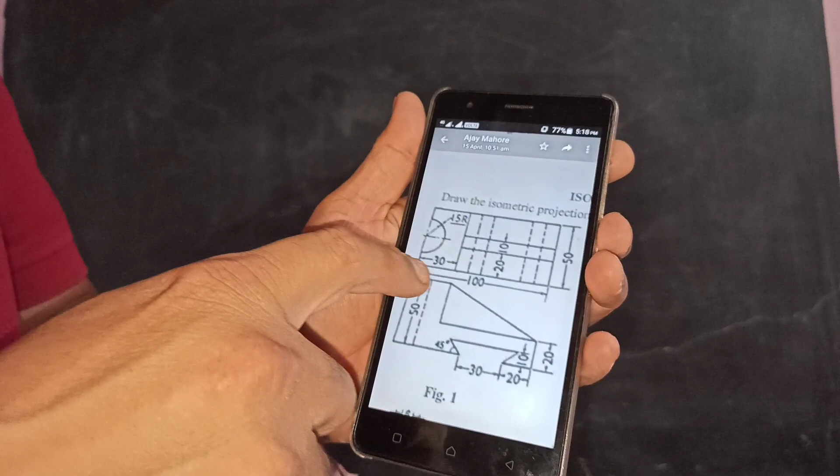We will see this problem on isometric. This is third angle projection, and this is top view, this is front view. So in front view we get the height and the length, in top view we get the length and the width. So the length is 100, the height is 50, and the width is also 50.

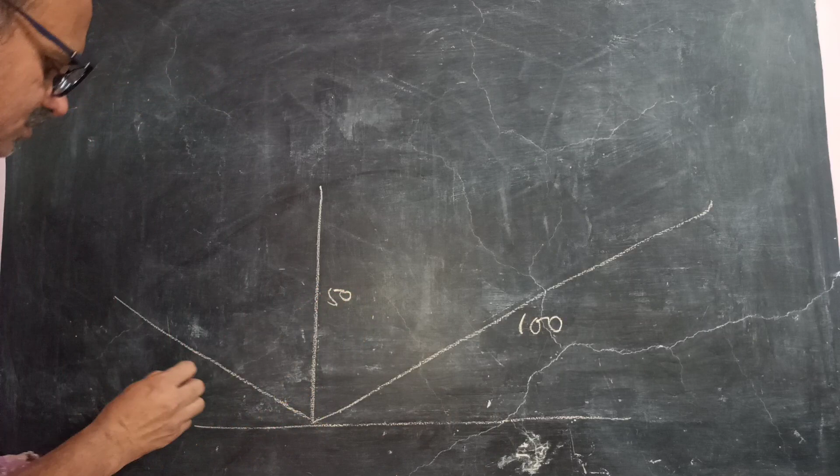Let us start. Draw a horizontal line. So this is 100 at 30 degrees, this is 50, and this is also 50. This is 100, this is 50, and this is also 50. This is 30 degrees as usual, this is also 30 degrees. So complete this box.

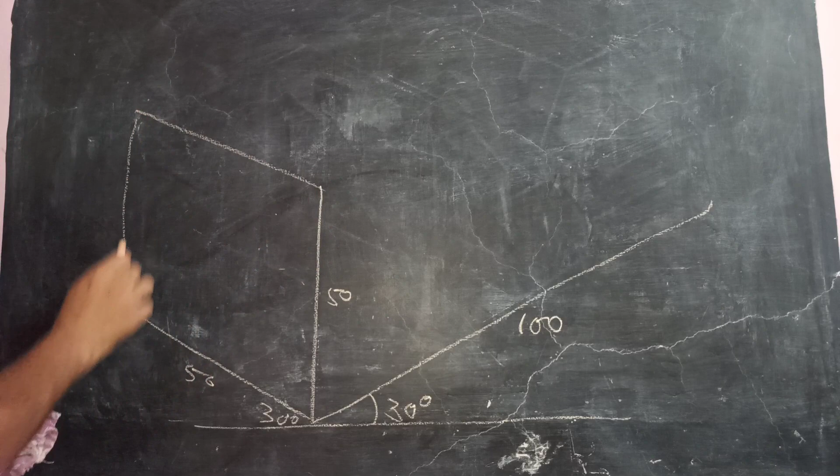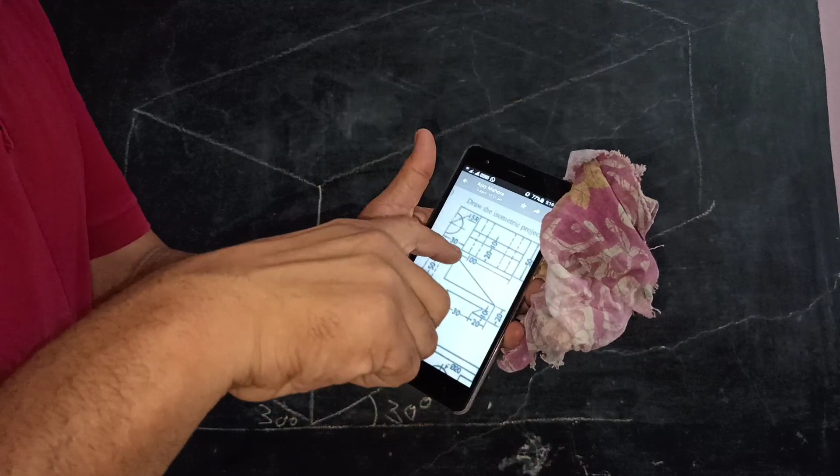Like this. So it is 50 by 50 by 100. Let us start from the base. So this is 30, so this is 30, which is straight.

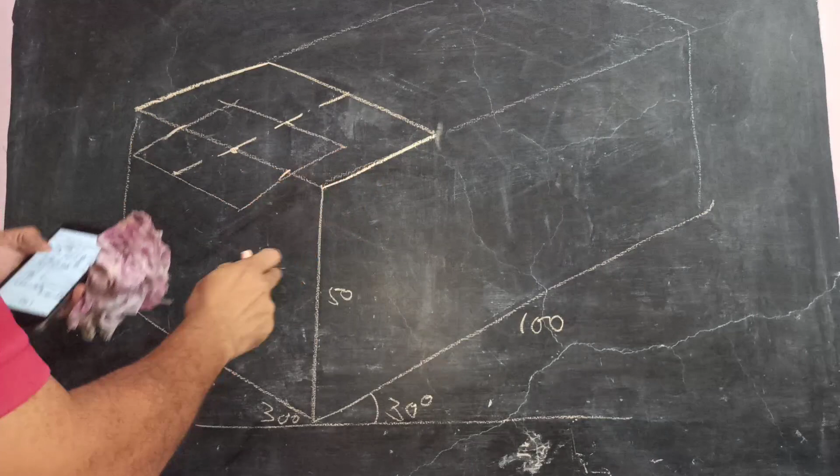So on all the sides 15, then 15, 15, and 15, all the four sides. Draw this rhombus parallel to this, parallel to this, parallel to this, and parallel. So these two lines must be parallel to this. These two lines must be parallel to this. So this is the rhombus. Here we got these two angles as 120 degrees. So you can join the midpoint of opposite lines from this.

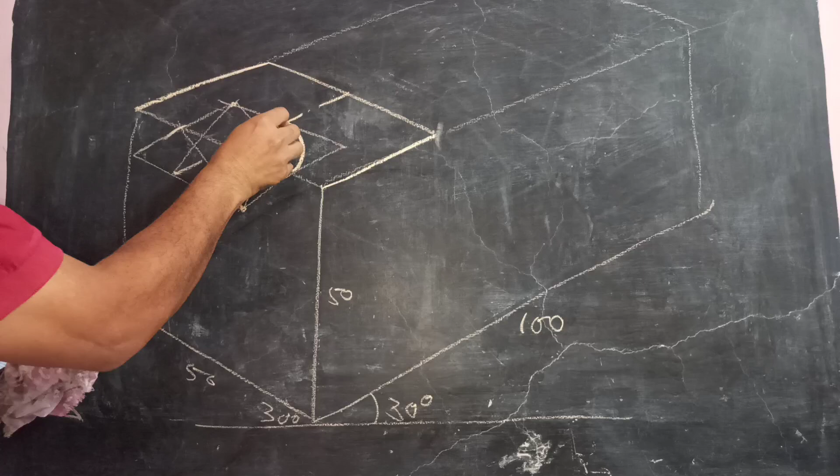And now it is a semicircle. So the two centers are of only use, this one and this one. So take this center, this much as radius, draw this. Take this as center, this much as radius, you can complete this. So this is what is the semicircle.

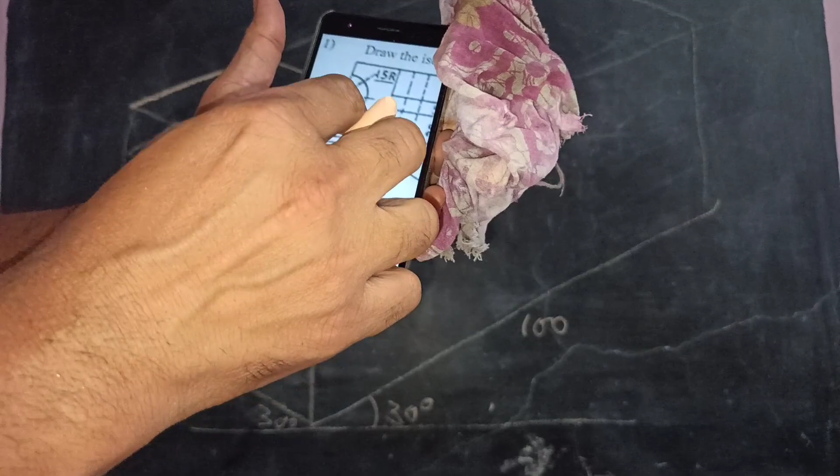Now it is throughout its height. You can see this hidden line. So it is throughout its height. So you can bring this downward parallel to this.

Now this semicircular slot, it must be here also. We have used these two centers. This won't be visible because it will hide behind this. You can bring this center by 50. This height should be equal to 50. Then take the same as center and you can mark this.

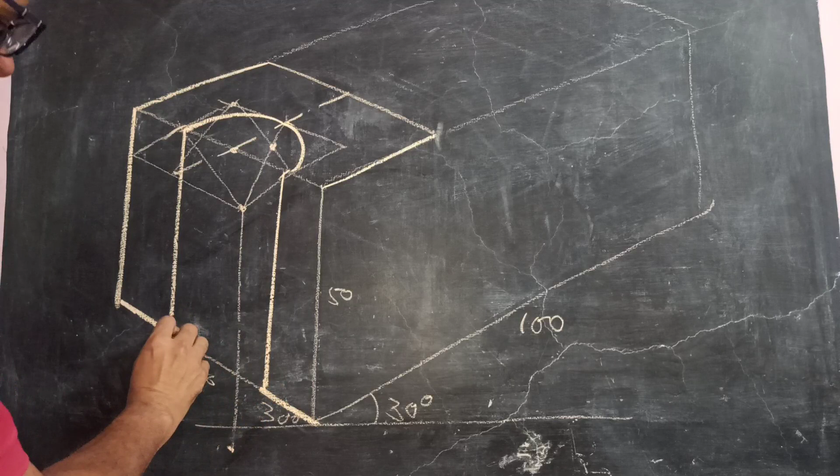So this is what is the semicircular slot. Then the height of this is 20. Here it is given. So this is 20.

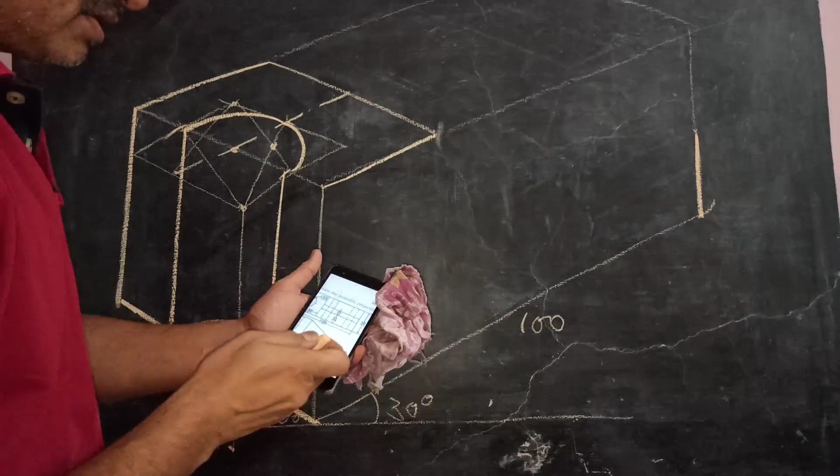And there is a dovetail slot here. So 20 you can leave here. Then the 30 up to this. So this is dark. There is a dovetail slot given at 45 degrees and the height is 10.

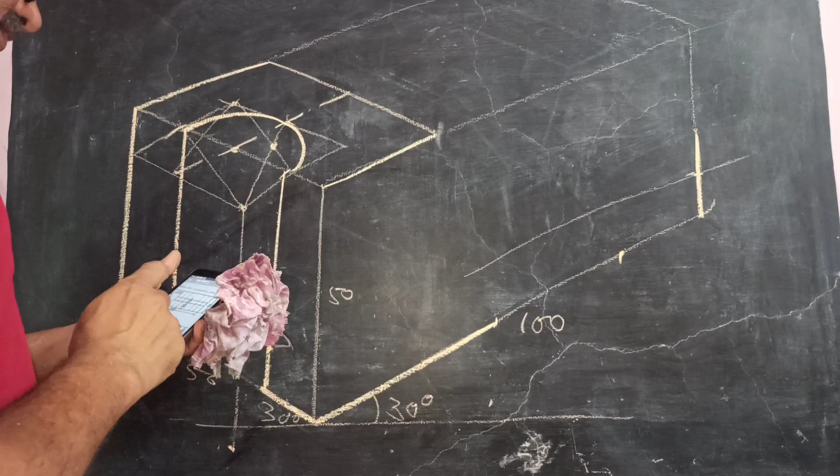So mark this 10. You can draw a line at 10. You can mark this line at 10 parallel to this. So this is 45 degrees.

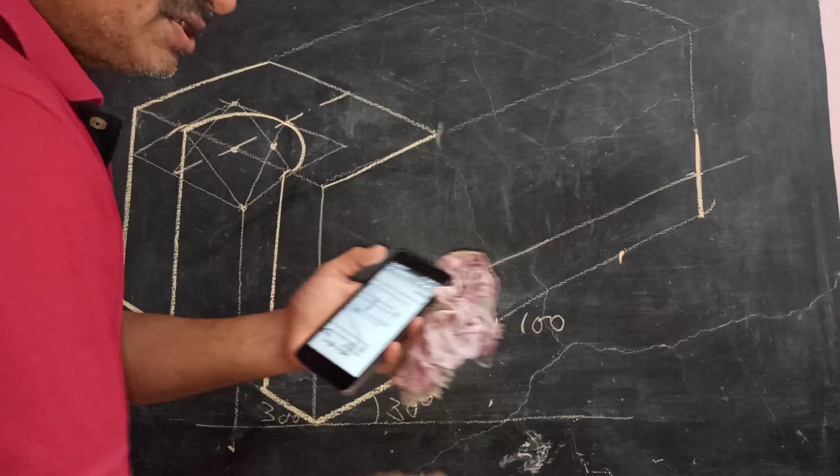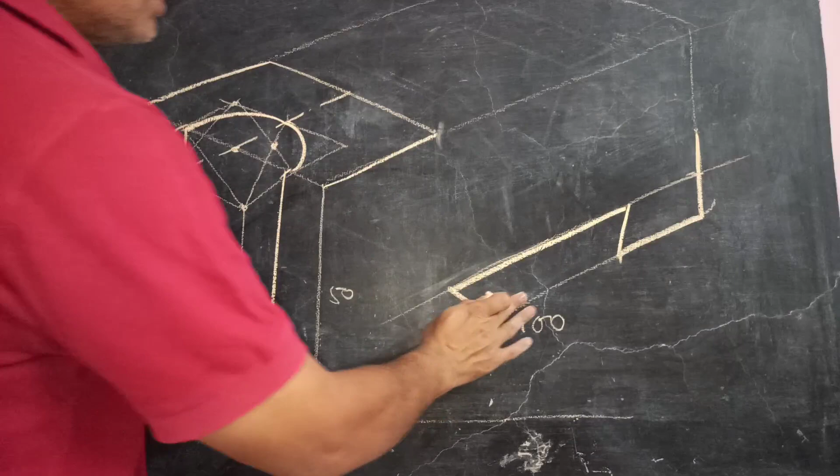Angle won't change in isometric. So at 45 degrees to this, you can draw this line. 45 degrees to this, you can make it dark. So this is what is the base. Okay, then there is like this. You can complete this with the angle.

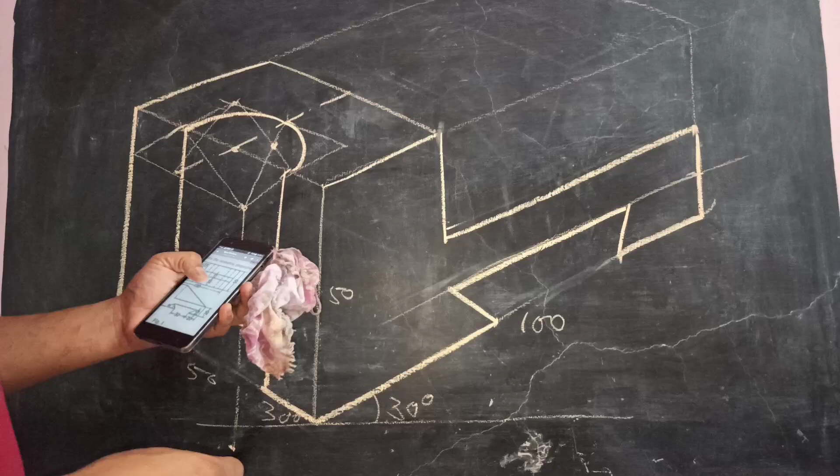So this is what is, so this is 50. So from here draw a line of 50 parallel to this, equal to 50 mm. Then you can join it with this. So this is also 50.

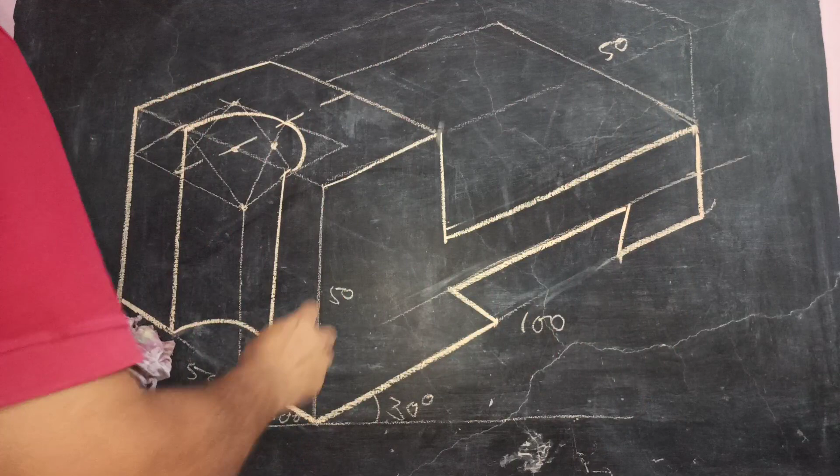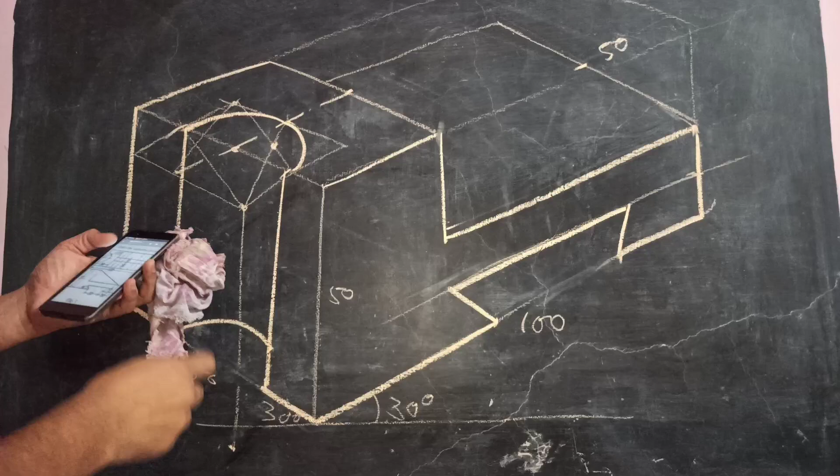Then there is an inclined rib here. So you can find out the midpoint of this. The midpoint of this is already there, and the rib is having the width as 10. So 5 mm on this side and 5 mm on this side. Join 5 mm on this side and 5 mm, then join this.

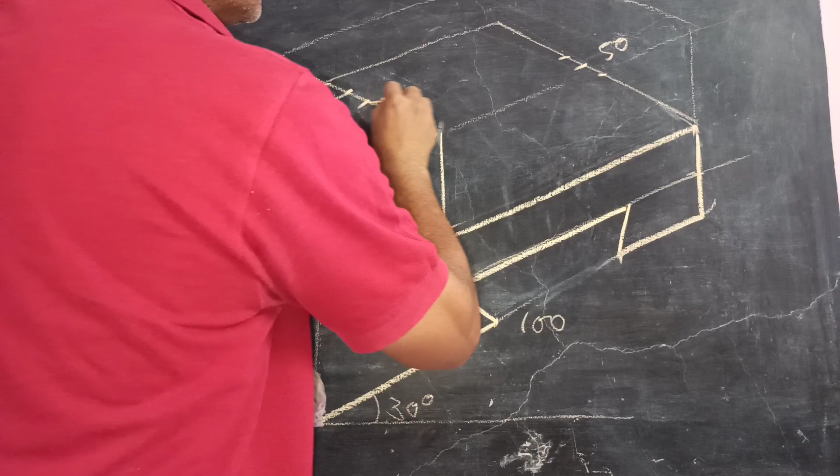So you can join it. Make it dark. Make it dark. And from this point you can draw a line parallel to this.

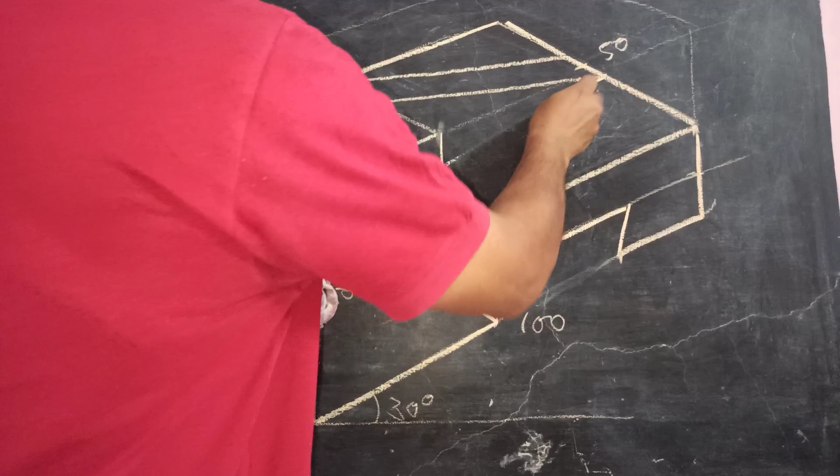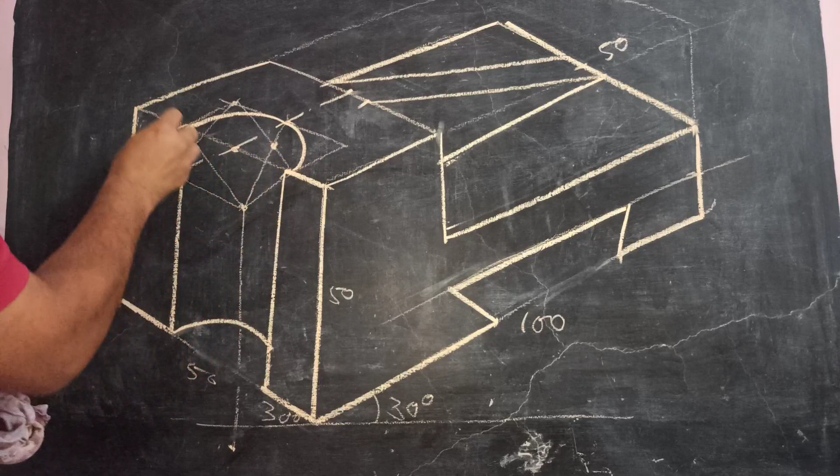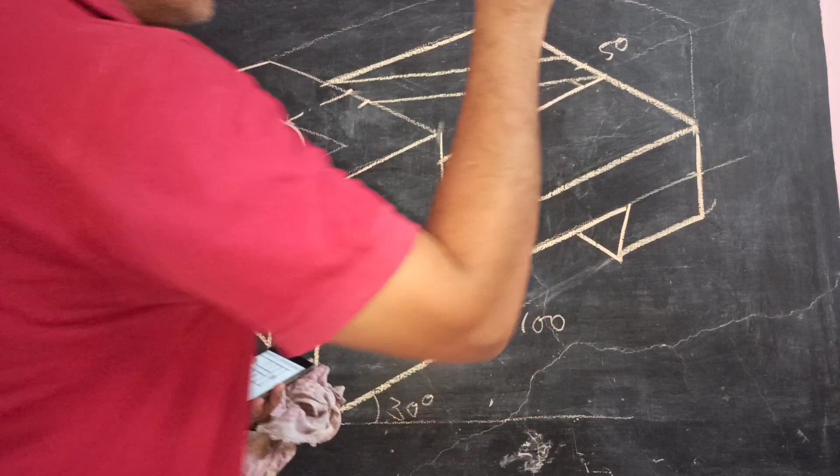So this is what is the isometric. This line is also dark. This line is dark, this line is dark. Then one small line is left parallel to this from this. So this is what is the complete isometric of the problem number 1, figure number 1, this one. Okay.